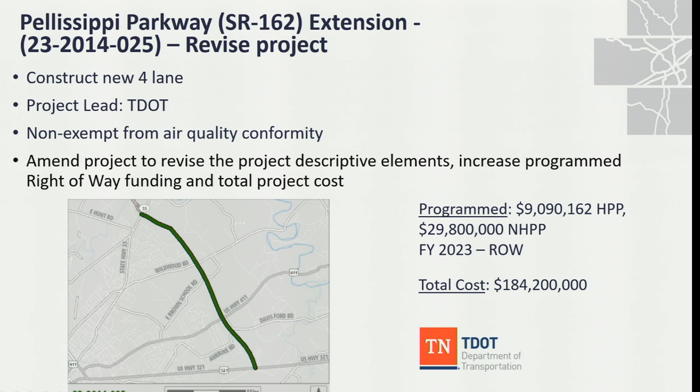Previously the description said 'from State Road 33,' so a fairly discrete change there. Those are the revisions to the project, and then clarifying the total project cost with that additional increase for right-of-way now stands at $184.2 million. I'll go ahead and proceed to the next project, and then we can have questions or comments on either once we discuss that.

Second is Foothills Mall Drive Extension Phase 2. This is another clarification, clarifying the project description, and the termini. The project length is increased to 0.76 miles, and the termini is revised from 'Foch Street to McCammon Avenue' to 'Foch Street to near Bessemer Street' as the new corrected termini. Project description: construct new two-lane road with turn lanes where needed from Foch Street to McCammon Avenue at Celtic Road.

And reconstruct McCammon Avenue, an improved two-lane roadway with curb and gutter, tying in with previous improvements near the Bessemer Street intersection. The project does include a multi-use path along one side throughout, as well as a sidewalk, I believe, on the other side. Brian, is that correct?

No funding changes are included with this change, so it is just clarifying the description as well as the map to clarify what's actually happening with the project, and you see what's programmed. We have some LSTBG funding programmed, design, right-of-way, and construction, again, in those years as shown. Total project cost is a little over $6 million.

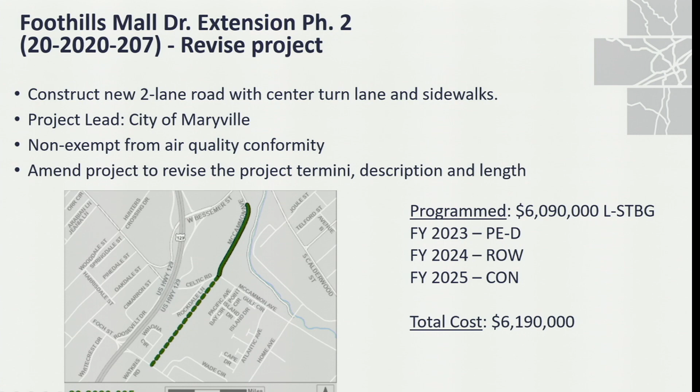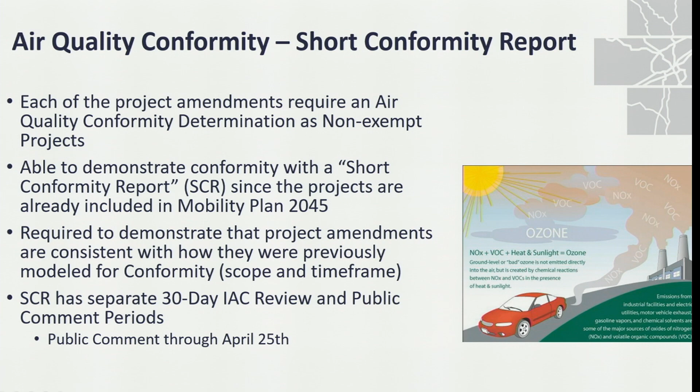These did go through as non-exempt projects through the air quality conformity report. Public comment ended on that yesterday. We did receive no public comment for those. If there are further specific questions about conformity, I would defer those to Mike. And this was presented to the technical committee, and they recommended approval of both project amendments as well as reaffirmation of the metropolitan transportation planning process.

If there are any questions, we can address those. Any questions for Craig? I guess you did a great job, Craig. No questions. Excellent. All right, we will entertain a motion to approve.

Do we have a second? Any further questions or discussion? Hearing none, all in favor signify by aye. Aye. Opposed? Thank you so much, Craig.

Thank you. And next, Dr. Watson.

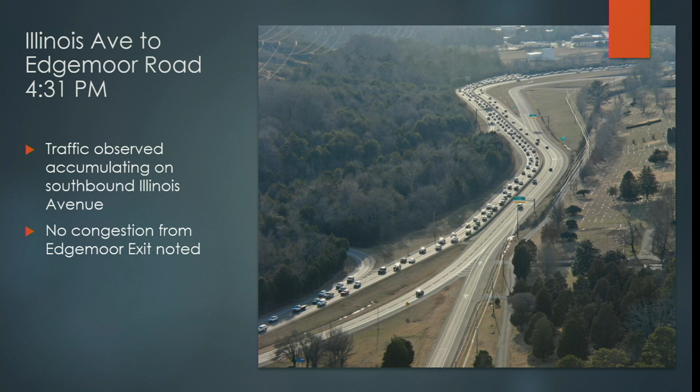I'm going to just show you the afternoon. The morning pictures are just the same, only the cars are on the other lane. As we look at the accumulation that occurs across the river from Solway, we begin to see southbound traffic really starts to muddle through from different locations. Edgemoor is at the lower part of the screen. The top of the screen is coming out of the Oak Ridge National Lab and also out of the community. There's a lot of cross traffic, 50,000 cars a day going back and forth across Oak Ridge, and we're continuing to see growth in traffic volume. But we're concentrating on Edgemoor today because it's a two-lane road with various turning lanes along the portions that are in the city limits of Oak Ridge.

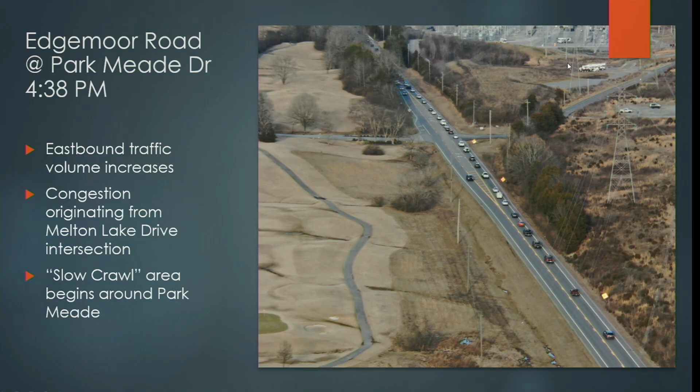So we've just got to reshare the screen real quick. Sorry about that.

Mr. Watson, while we wait - yeah, so just real quick, Edgemoor's between 75 and 95, right there where Bull Run, at Bull Run Steam Plant, as you cross to go into the Oak Ridge area. I was just trying to wrap my mind around it. Okay.

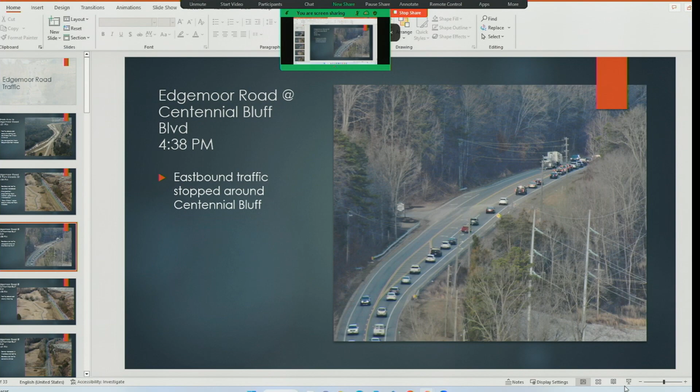As she's getting that fixed, I said a couple of things that I wrote down here. We took action in December to postpone any further action on it. However, we know that in Oak Ridge there are about 3,000 jobs on the 3 to 5 year horizon coming in. So there's going to be more traffic. This is a job work zone for the region, and getting people in, getting people out, and even evacuation procedures have to be prepared for the project. I think the traffic in the Centennial Bluff area between the Bull Run Steam Plant and on into Oak Ridge is the area we've had more concern about. We've got a small bridge that comes across at Pellissippi Parkway and across the lake there, and then everything kind of turns into spaghetti as we look at that.

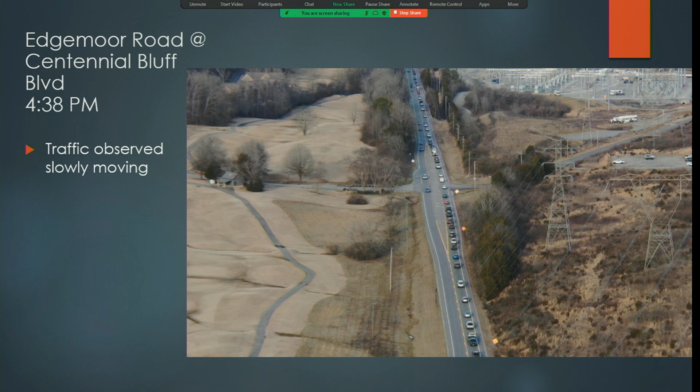On the left side you'll see the City Golf Course. That's not adding a lot of traffic, but considering there's another mile and a half of length to the Clinch River Bridge, you're stacked up at the end of the day there - very slow moving traffic. This one has live moving data, so you can see we're moving about 15 to 20 miles an hour. We went back to our records, and in 2011 there was a planning study by TDOT that stated we were at a category level E for this arterial. You can only go up to category F. I'd say that at 5 o'clock in the afternoon you're at a category F, slow moving if not almost completely congested.

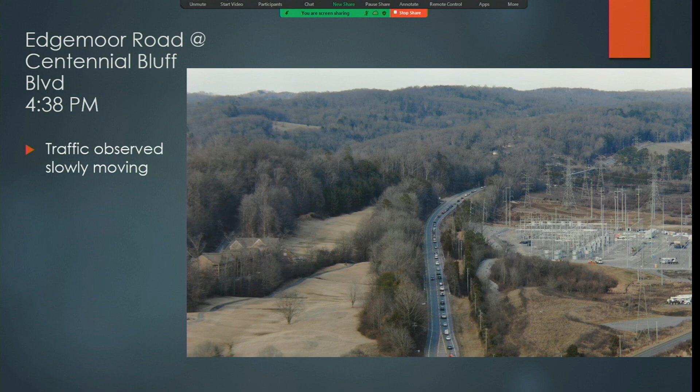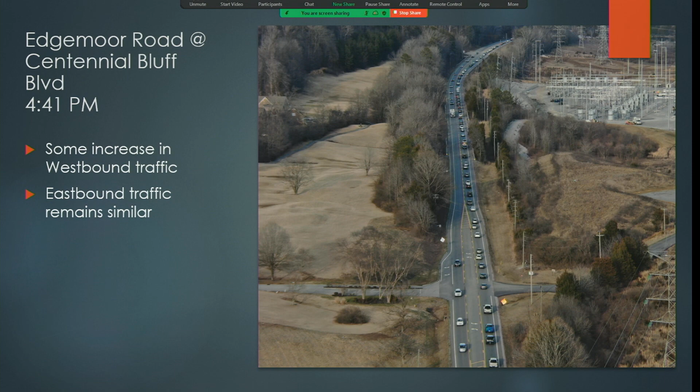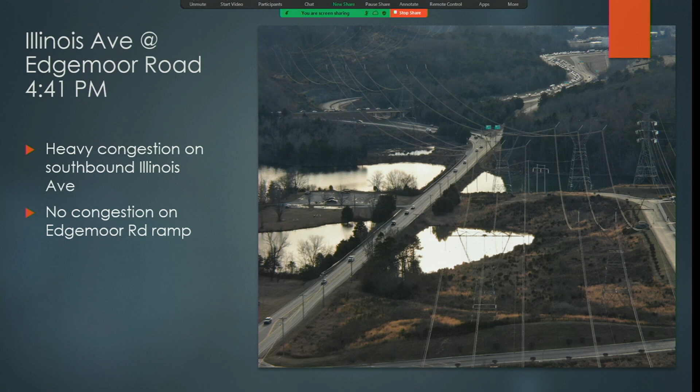As we look at further facilities, you'll see to the right at the top of the screen a brand new substation. This is in preparation for the demolition of the TVA steam plant at that location. They had to build a new transmission line, and we've just completed that construction. As you get in, you see a very narrow entryway into that area with two lanes of road and traffic. We're trying to splice between a number of TVA towers, and you look at heavy congestion southbound on Illinois - you don't see any congestion on the Edgemoor ramp in the afternoons, but in the morning that's completely solid traffic all the way across to Clinton Highway.

Another shot here as we look at Park Meade and the intersection as we come up to it. To the left you have subdivisions and residential areas that come off at that point, but it is a complete solid lane. You can see the truck at the bottom—that's solid all the way out to the bridge.

So what we're trying to do is provide service for 15,000 workers a day coming and going. Many of those workers are coming from North and West Knox County, Oak Ridge, Roane County, and Anderson County. There's also a lot of workers in Clinton—Mr. Gann knows how many people are working in Clinton—so you have a lot of transportation to and from across the highways.

If I got it, it's a big file and everything, so we're—

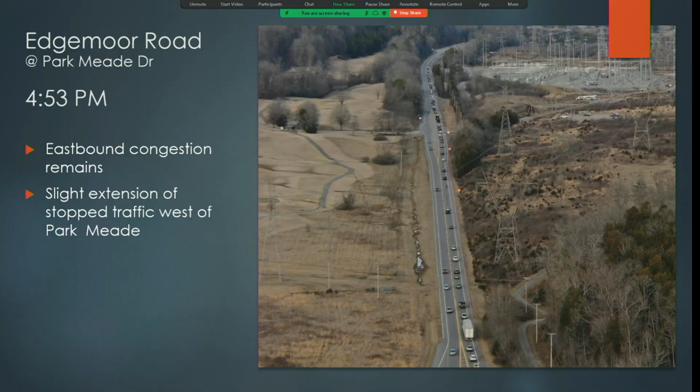As we look at coming into the narrow areas, you can see how this begins to stack up. This is Melton Lake Drive, a north-south drive connecting Clinton Highway to the Oak Ridge Turnpike, the Oak Ridge to Clinton route, and then you also have Edgemoor Road. So you have cut-across traffic and gravel trucks from various gravel yards and quarries. As we look at that, we begin to see that constant accumulation.

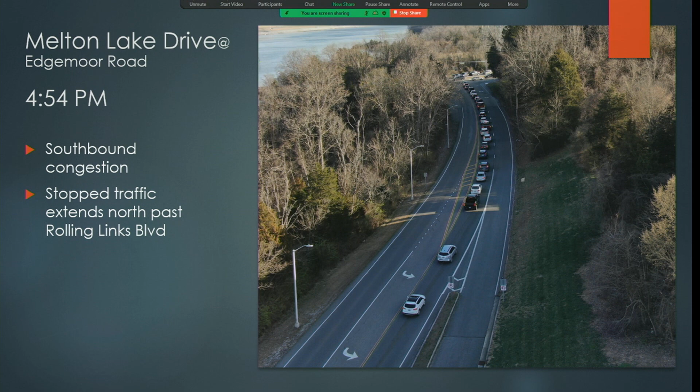I think as we look at these categories and the road ahead, one of the big things on the horizon for the region is the building and construction of a lithium processing facility. This is a national security high priority, and that's going to mean another 600 workers coming in on a daily basis. I just don't think our roads are going to be able to handle that over the long haul, waiting until 2035. So I present that to you today.

Just a quick list of things that are happening. We have two small modular reactors being built on the other side of town, so you're going to have traffic moving east and west. We also have TRISO-X, a nuclear fuel fabrication facility, starting out with 400 jobs by December '24. So folks are going to have to go across this corridor to get to that particular location.

I've talked to Mayor Frank about how we go through the Claxton area—that's very difficult from a terrain and geologic standpoint. We're going to have to look at how that road can be built; the bridge needs to be expanded. You're going to have truck traffic tearing up the route to the Bull Run steam plant, and we're still going to have workers getting in there on a daily basis.

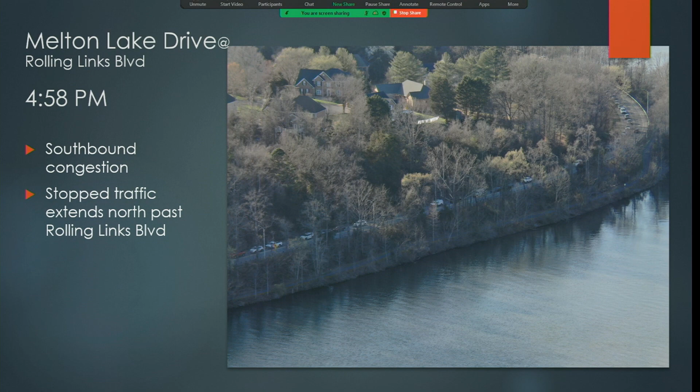There's many different things happening out there, and I thought showing you some of these pictures of what's transpiring would help. You can see the traffic backing up north and south trying to get onto Edgemoor Road, and we also see Illinois Avenue. You have boat ramps, holiday periods, and lots of recreational usage out there—there's 700 acres in the Haw Ridge bicycle and recreational area—so we continue to see a lot of activity there.

I think we're going to reach a point where we come to a standstill if we're not careful. So I bring that to your attention today and give a live picture of some of the things we see in our transportation improvement program.

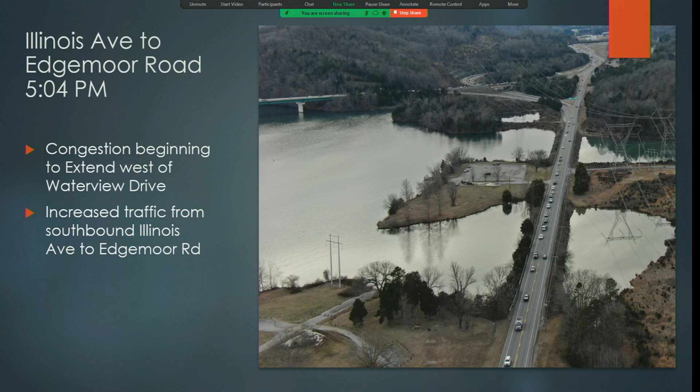On a final note, I want to give my thanks to TPO. When I arrived here 12 years ago, we were considered a rural county and were not part of the planning of this region. With all of the workers we have coming into Oak Ridge now and in the future, we're anxious to be part of that process and prioritization of moving people to and fro. We've asked for a meeting with the commissioner, and I think all of the Department of Energy heads have asked that meeting be held because they're really starting to struggle getting their people in and out with new security measures on the Department of Energy side.

So we appreciate this opportunity to present that to you today. I'd answer any questions—thank you so much, Dr. Watson.

Any questions for Mark? Dexter, did you want to comment on this? Sean, I know you're going to be taking over here—any comments from you?

This was the first thing we discussed when we talked about Dr. Watson leaving the city of Oak Ridge and me coming onto the TPO. It's the number one priority for the city from a transportation standpoint. It's obviously an encumbrance. I appreciate Dr. Watson putting this briefing together so you guys can see what we're dealing with on a daily basis. We would invite you out, but nobody likes to sit in traffic. It's a frustrating time to transit in and out of the city. Look forward to carrying this forward for the city.

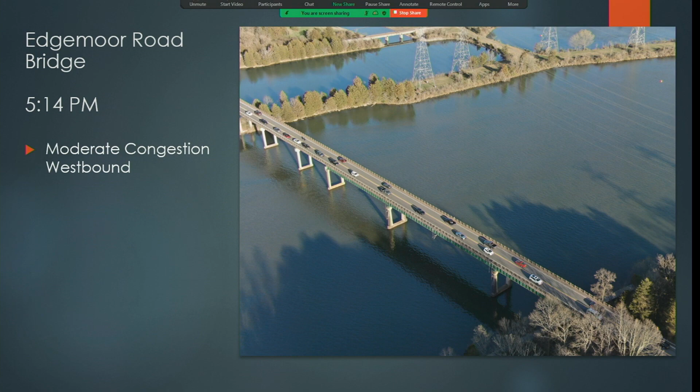And we've got a landing point. We've got TVA land available for the landing point, and those should be constructed as soon as possible, because you also end up with something like this. And if that happens during rush hour, then you're really log-jammed up trying to get around, and that creates hazards on other parts of the roadway system.

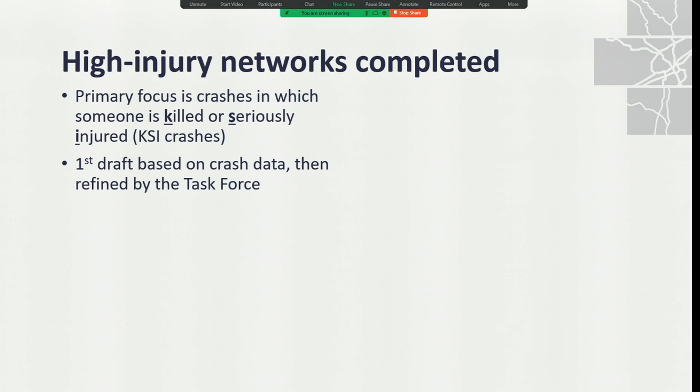So we have created a couple of high injury networks for our region. This process involves focusing in on those fatal and serious crashes in our region—we call them KSI, someone's killed or seriously injured. We had a first draft based just on the raw data of where crashes have occurred, then we've refined that through a task force working with us, which is a subset of folks on the technical committee.

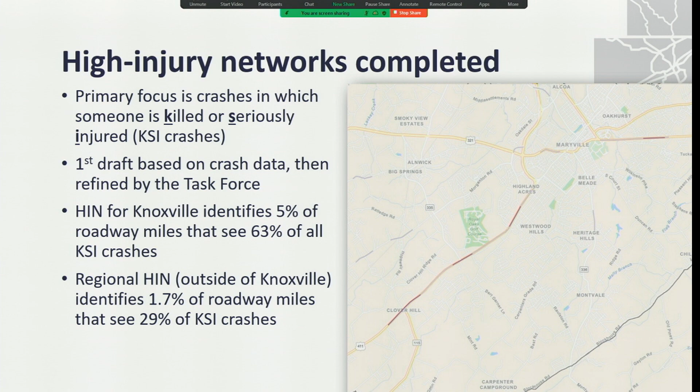We've also identified a separate high injury network for the region outside of Knoxville. Fatal and serious injury crashes are more dispersed in the region, so it's a smaller share of KSIs—still almost 30% of KSIs occur on just under 2% of roadway miles. So it's still a really good concentration. This is showing a little bit of Maryville, where you see the HIN along West Broadway, coming out of Maryville.

So the next step we're working on are crash profiles. These are ways of identifying the location and circumstance that see the most KSI crashes, so we can look at other corridors or intersections that may have similar characteristics, and address those as well—not just reacting to where KSI crashes have occurred, but looking at similar locations where they might occur in the future.

Some of the things we've seen: left turns at signalized intersections is a frequent crash type resulting in a fatal or serious crash. Crashes involving people walking or cycling along major arterials with commercial land use. Motor vehicles striking a fixed object—usually roadway departure crashes. And a good share of motorcycle-related crashes along higher speed roads. The safety plan will identify 6 crash profiles, and we'll share countermeasures that can address those, again, where crashes have occurred or even where they haven't.

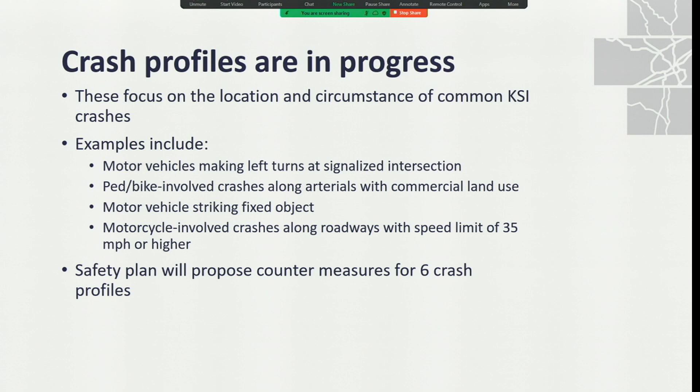We've done some public engagement as part of this. It's really a data-driven plan, but we wanted to get some public input as needed. We had a regional survey hosted on the TPO website, and the City of Knoxville did some targeted outreach focused on the city with different organizations and individuals. Altogether, we heard from 9 organizations and nearly 500 people responded to the surveys.

As I said, we've already heard from Federal Highways about a first round of funding through Safe Streets and Roads for All. They awarded 37 different projects for implementation—none of those were in Tennessee, so that tells me we're due, right? Of those 37, there were 14 that focused on a specific corridor, another 8 that took on more system-wide improvements, more geographically dispersed. 35 of the 37 included pedestrian safety features, 27 had bicycle safety features, and 27 had a focus on equity. So just getting a sense of what Federal Highways is prioritizing in these grants.

In addition to those implementation grants, more than 400 awards were given for planning, which we're already undertaking now as a safe systems plan. So all of those safety plans are going to be starting this year—they're certainly not ready for implementation funding this year. That's why I'm thinking this is the year to go for implementation funding, because we're ahead of the curve since we're already getting this plan in place, and we'll have it done and back to you for approval by June. The applications are due in July, which is why we have to have the plan approved in June.

Luckily, we have a really good video that will give you a good description of what we're going to do here, and then I'll go through an update on how we see construction playing out. This video is about 3.5 minutes long.

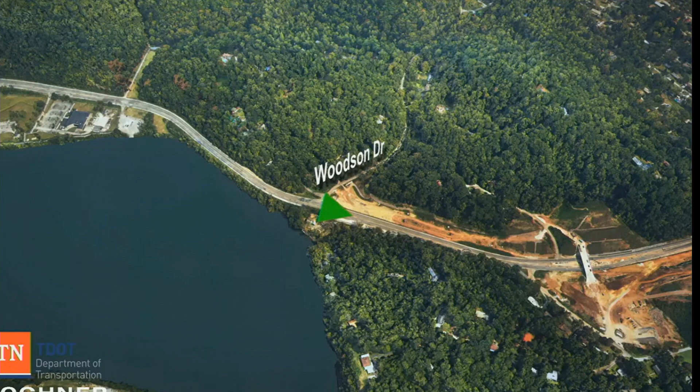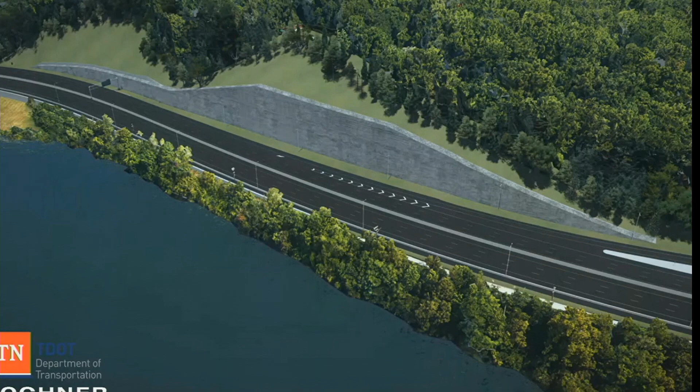Maybe it's not going to get the audio, so I can describe it. Here is the existing project under construction from Woodson Drive down to Maloney to the south. This project starts at Woodson Drive, and what you see here is the 4 lanes sandwiched between Rock Mountain and the river or lake. We will be moving east into the slope with some pretty dramatic rock cuts and retaining walls, and we'll end up with a 6-lane facility, 3 lanes in each direction, through this corridor in Knox County.

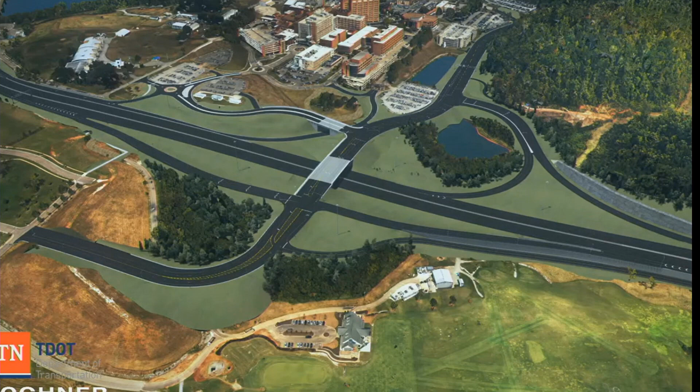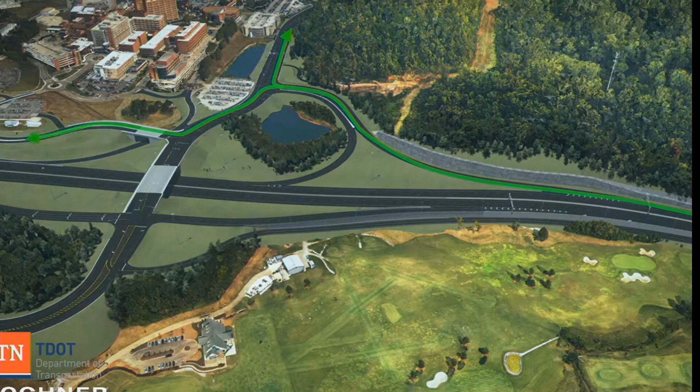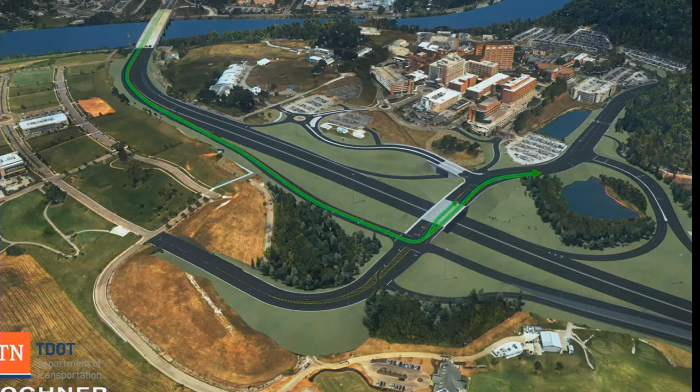What you will see next is along the arrows coming from northbound, showing you how you will access the hospital. And then coming southbound out of Knoxville, it's the same thing — you'll have arrows that take you through the interchange and show how you access the hospital. So what this interchange does differently than the existing one is it supplies good access to UT Research Park at Cherokee Farms, the golf facility, the Naval Base, and Marine Park.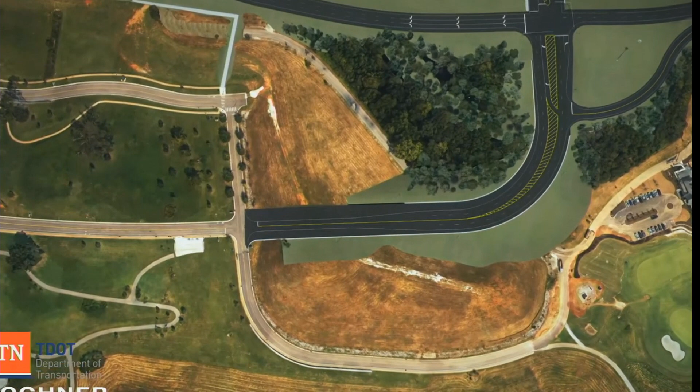Currently, the Marine Park and Naval Base have at-grade access, and so do the other two for that matter, just to the north of the screen. We'll be removing those and providing interchange access control. It provides better access for all of these facilities, safer access for future growth in the research park, and continued safer access for UT Golf, Naval Base, and Marine Park.

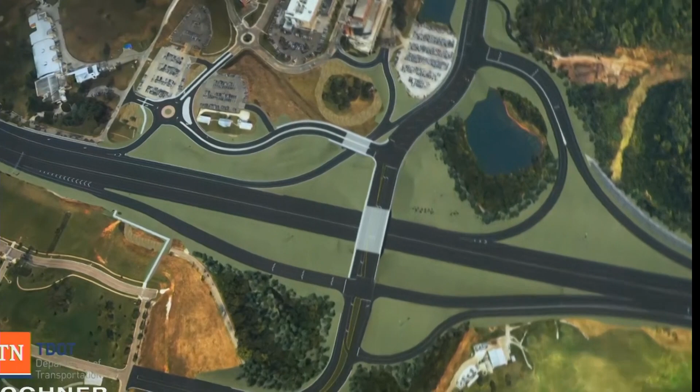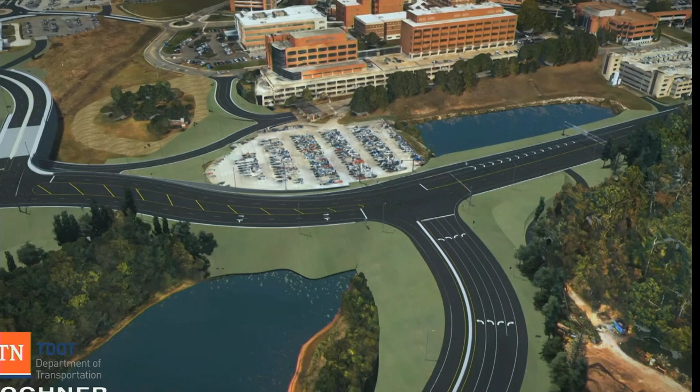You also see the greenway along the bottom, the Knox-Blount County Greenway system. It's going to tie up and come all the way to the hospital through a pedestrian tunnel that goes underneath Alcoa Highway. You'll also see a signalized intersection here as you come off the northbound ramps that will feed into the new hospital entrance in the middle of the interchange, with a signal to the east that operates at Medical Center Way on Cherokee Trail as well.

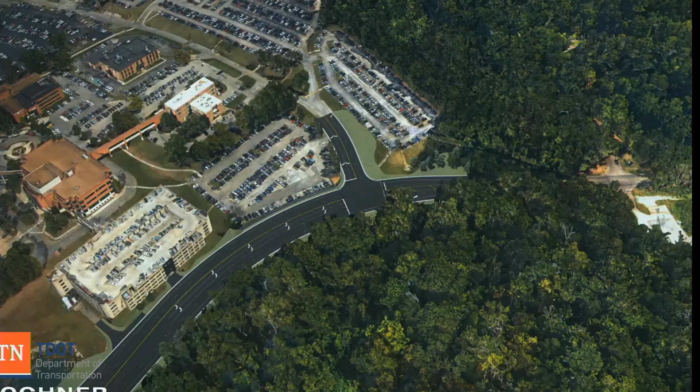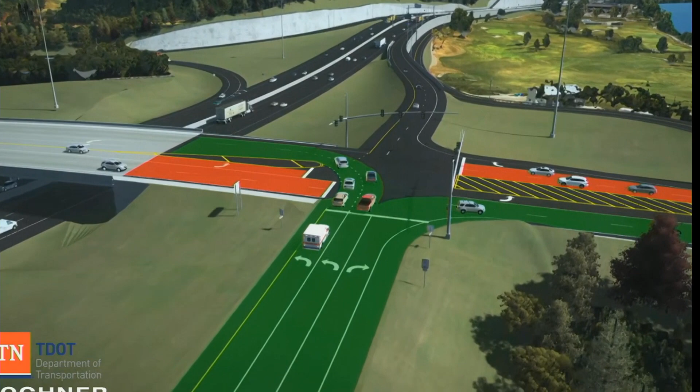We are also using signal preemption in this project to allow for faster access for emergency vehicles. You'll see the red pavement indicates there's a red light currently, and the signal preemption coming from the emergency vehicle will change the light instead of them having to wait in traffic during an emergency situation. Again, it'll go through the next red light and do the same thing, making the light change to keep them from being queued up in traffic — much safer than going around folks and asking everybody to stop.

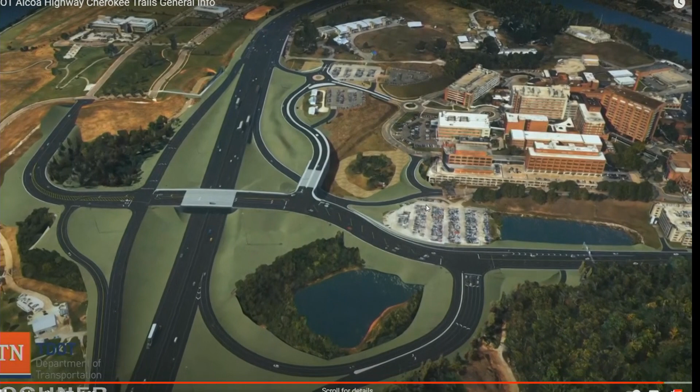So, this project is set to go to construction. We plan to let this project on May 12th, so we're under a month — I think we'll be 2 weeks from Friday. So we're motoring into construction pretty quickly. What I'd like to do is go through a phase diagram of how the project is planned to be built. I'm not going to go into a ton of detail — I could do an hour-long presentation on this piece — but just to give everybody a good feel for how the project is going to be delivered.

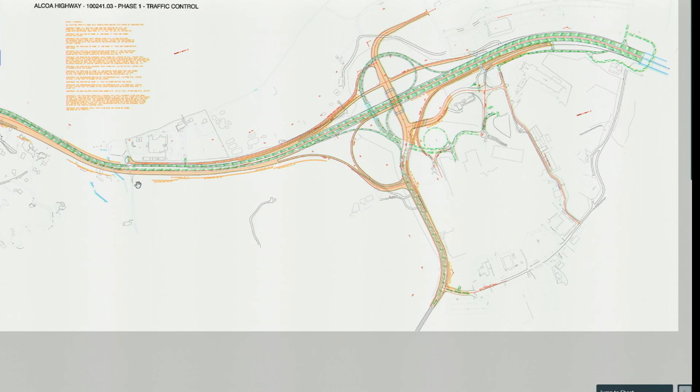This diagram, while it's not as clear on the big projector screen above everybody, you can kind of see it better on the screen to my left with the colors. So what this depicts is the traffic phase in phase one of the project. You'll see the orange hatched areas where we're asking the contractor to work, and what you'll notice in phase one is that most of the work will be happening to the outside of the existing pavement. The green arrows indicate where traffic will be running — 2 lanes in each direction going north and southbound through the duration of the project. But definitely in phase one, you'll see that it's an existing traffic pattern.

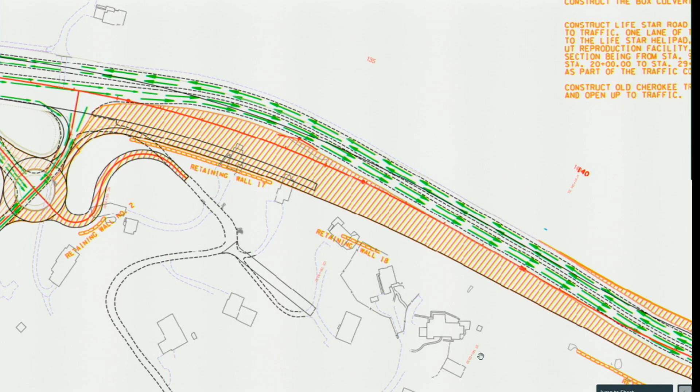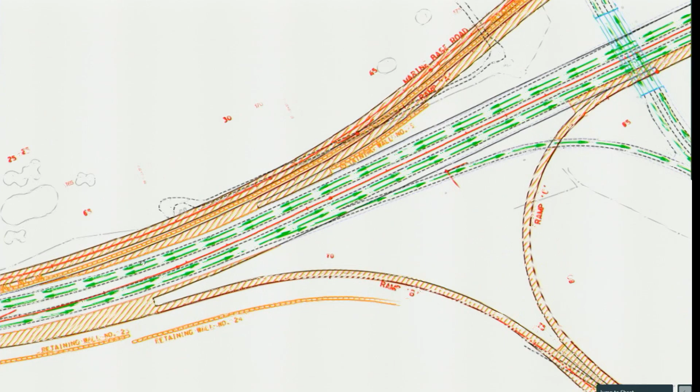We anticipate probably 85-90% of this project will be done in phase one. It's a good 2.5 year window to do phase one work, so traffic will not change during the first 2.5 years of the project. It'll be just as it is today. You'll just see a lot of construction equipment going into the rock bluff, new bridges being placed, new ramps being built. All the new ramps will intersect existing ramps at grade, so we'll be able to do traffic swaps in the middle of the night with very low impacts to our motoring public. So again, a lot of work going on in phase one.

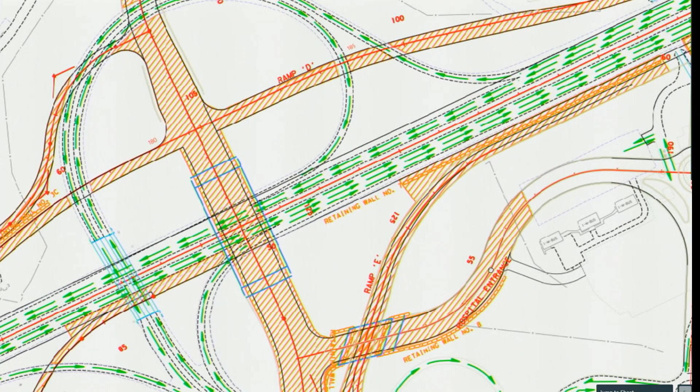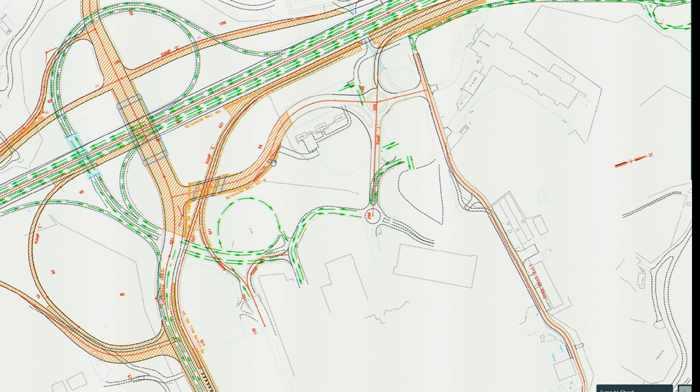We'll be doing work inside UT Hospital's complex where we interface. We're doing a Life Star Road replacement project that helps them with mobility through the UT Ag and UT Hospital campus. We'll be in their front yard working, but again, traffic for them does not change in the first 2.5 years. That's what I want to highlight most: yes, this is a four-plus year project, I think we've got 4 years, 3 months as a contract completion date. But in the first 2.5 years, we'll get around just like we are today with a lot of construction going on around us. There will be work impact along Cherokee Trail, but traffic will still have the same lanes they have today.

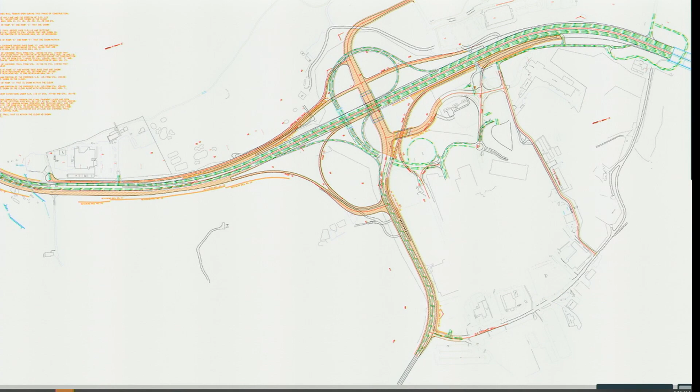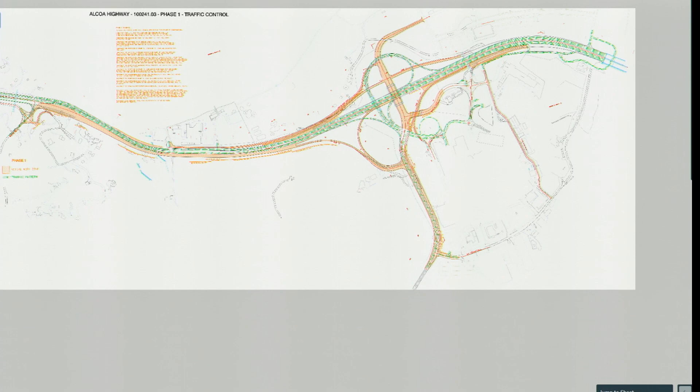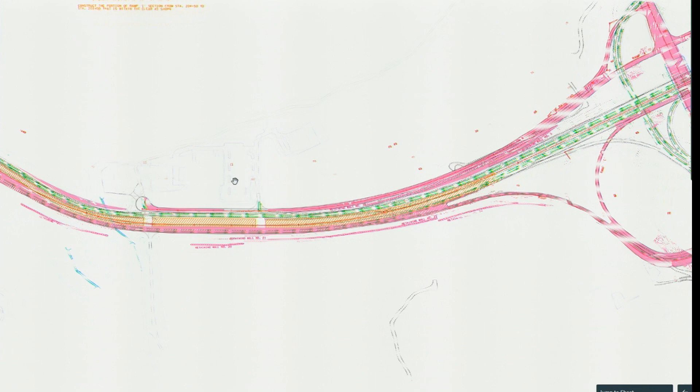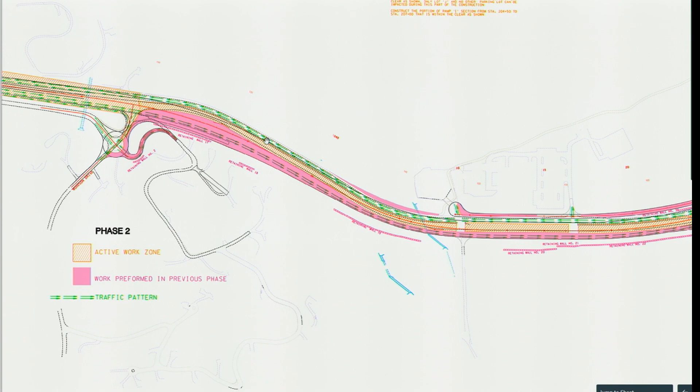As we move into phase two, these drawings now indicate the magenta color as previous work from a previous phase. This is where we'll start seeing, in the 2.5 year range, traffic changes. Northbound traffic now flows through the magenta area, which is where we worked in phase one, but still 2 lanes going north, 2 lanes going south. Southbound traffic will still be where it is today. We'll be working in the middle in phase two, and the northbound off-ramp for the interchange will be turned on at this time. This phase will take several months of work here as well.

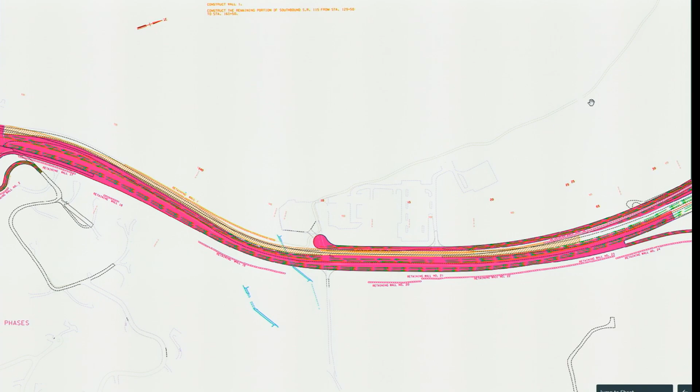Going into the next phase, 3B, is where real traffic swaps happen. In 3B, we now have the new frontage road that will serve the naval base, Marine Park, and UT's golf facility. The interchange is open, 100% open. We have access going over to UT Research Park at Cherokee Farms, and the new frontage road is open, as I said. In this case, the new ramps going northbound from Cherokee Trail are open.

The off-ramp is open, the ramps southbound are all open, but we do have a gap where current traffic crosses into UT Hospital. So we'll have a phase here where we're going to be expediting work. It's about a 28-day phase to close this gap. Traffic control, the pattern to enter the hospital will be a little strange during this phase. We've worked with FHWA, recognizing we're going to have this odd traffic pattern, to offer a $1 million incentive to the contractor to get this work completed in 28 days. Assuming they do that, they get the $1 million bonus. If they don't meet the 28 days, they go from a $1 million bonus one day to a $30,000 liquidated damage the next day.

Again, it's good collaboration with FHWA to get this approved, for the best benefit of the motoring public. For northbound traffic - southbound traffic's fine, it's northbound traffic - but given the level 1 trauma center that UT Hospital is, getting this phase done expedited was of the utmost importance. So 3B is a short, less than a month, 28-day process. Hopefully they can beat that. We've done a lot of engineering here to expedite that with a geofoam fill and retaining wall system that will help expedite this phase.

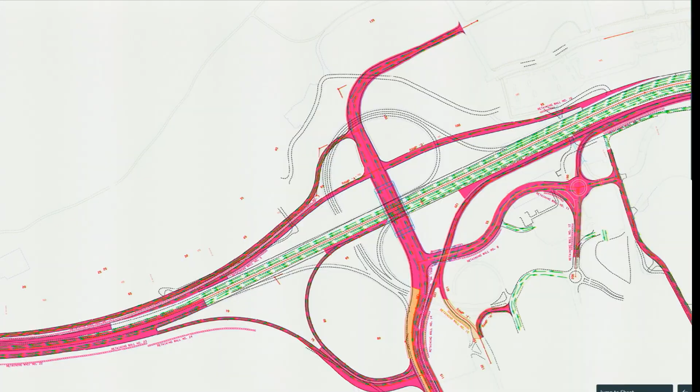In 3C, we become fully open and fully functional in every direction. We will be still doing some ramp work for how you leave the hospital to go northbound, tying into a slip ramp that will allow those folks to have free flow leaving the hospital to go northbound, and some work on Cherokee Trail. Then when we move into phase 4, it's highlighted there with the orange area, going through on Alcoa Highway there in the middle of it.

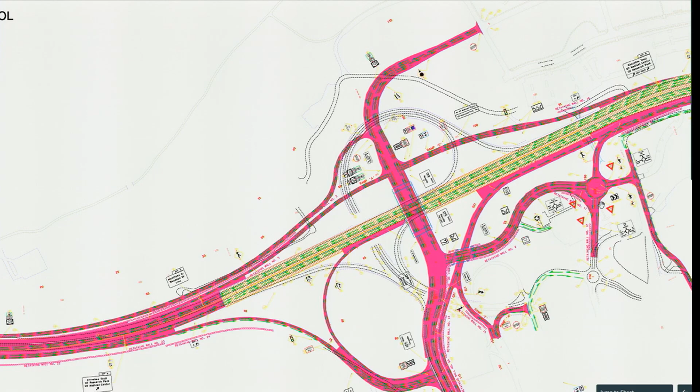We'll be doing a lot of paving, signage work, general cleanup and punch list items in phase 4, and this will finish the project. So again, what I want to reiterate the most is this is a super important project to this community.

It will get the third of 3 projects in Knox County under construction for Alcoa Highway. We will still lack 3 projects in Blount County, with one of them being let this year. But the significant progress into this corridor, and just how important this piece is. Again, we anticipate it being well in excess of a $100 million project. 4 years, 3 months is the contract date as we have it right now.

We will have 2 lanes in each direction on Alcoa Highway the entire time. We have a really good plan set forth for the contractor to be successful in maintaining traffic as we need it to be. We will have rolling roadblocks. As you are aware, this rock bluff we're going into, we will not pull blast or pull shots there while the motoring public's going by. We do have significant safety barriers that'll be in place, but we still don't want those folks driving by while the blast is being conducted.

We also have significant measures to keep the contractor from being overly aggressive with blasting. We've made it part of the contract to have significant fines for the contractor, or liquidated damages, if they were to impact traffic after the rolling roadblock. So if the blast were to get rock in the road and we have lane closures, those are significant to his pocketbook. So I think we have set up a project that has the appropriate amount of time for construction, while allowing the contractor to be almost surgical in getting that rock bluff down.